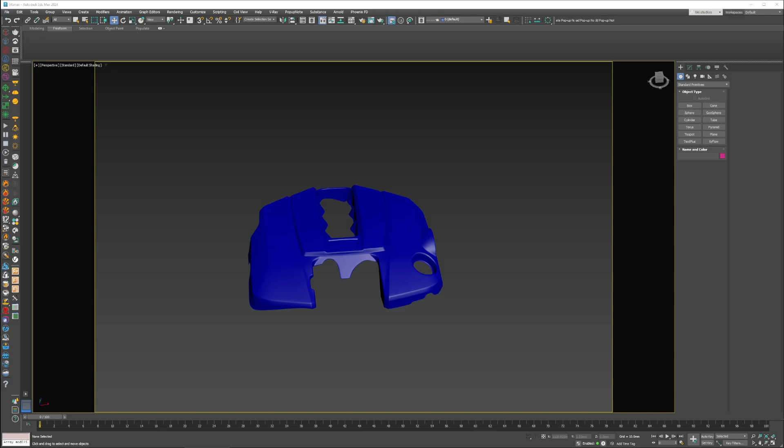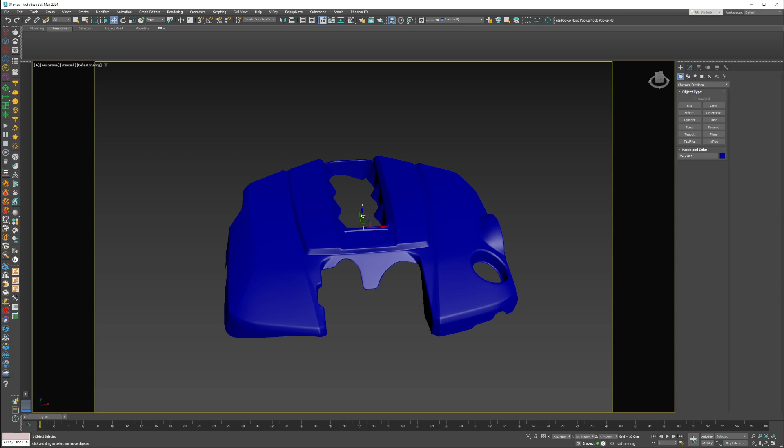Now that we have the model done, for people doing the carbon fiber stuff like myself who are 3D printing molds, we need a flange area and to close off any holes, so that it's a proper mold. This is going to be another video tutorial like the other one that's tedious and long, but hopefully informative.

I have a new file saved so I'm not destroying my old one, and now I'm going to treat it like I would on the table. First, I'm going to flip it upside down 180 degrees. In 3ds Max, when working with a 2D shape, there's a front face and a back face. The back face is black, and the front face has a tone to it.

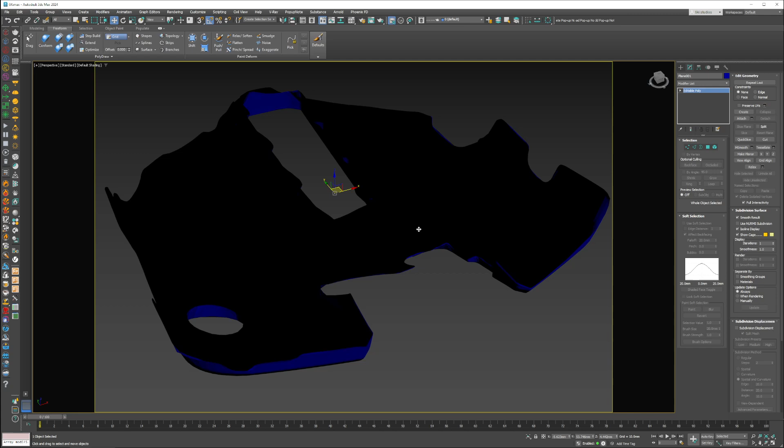So what you have to do is select all the polygons with Control A, and click the flip button. Now it's flipped inside out. This is good, this is what we want, this is our front-facing object now.

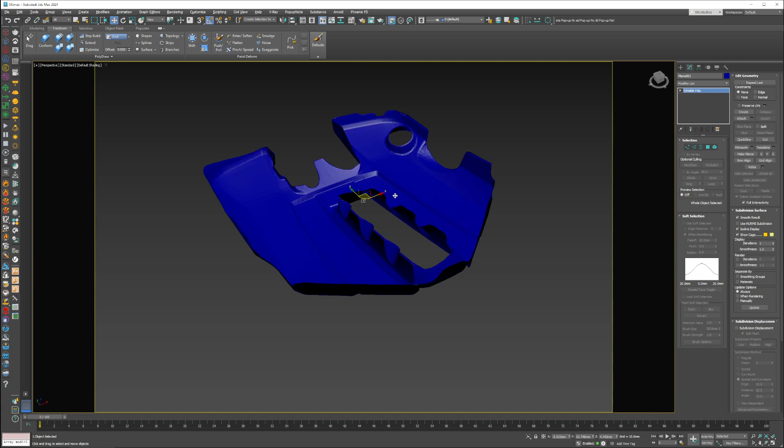Now, just because of how I would look at it, I want the mold to be laid out kind of like this, just personal preference. So I'm going to make the object color black by going here, and then give it a material.

Pressing M opens up the Material Editor, so I'm just assigning a random color. The reason is if I press F4 and click off of it, now my wireframe is black, but my material color is green or whatever you want it to be.

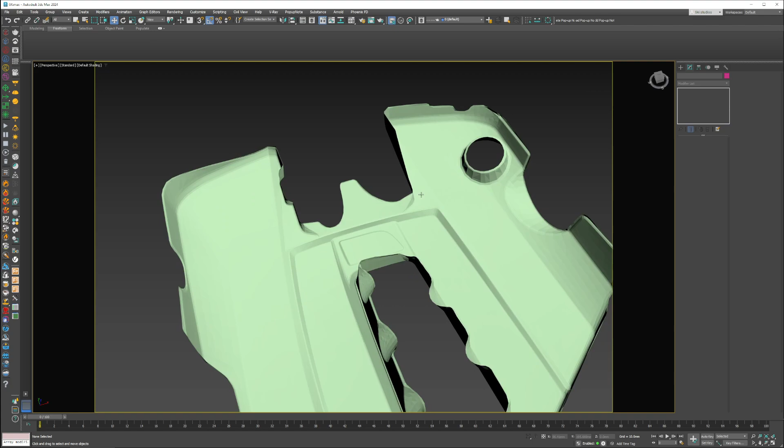First things first is the oil cap. Now what I'm doing on the CG side when I make the flanges, I also like to give myself a reference, kind of like cut lines. So before I start doing this, I want to go Control A, select all the polygons.

See where it says smoothing groups - you want to click clear all, and then click on one. Then for the version of the tutorial, let me move my... I hate doing this, but for the sake of the tutorials it is important.

Here you have your material editor, and pressing M opens it up. Here you'll probably have it set to standard or something, and if you don't have it displayed like this, you might have it another way, which is not my cup of tea. If you click on modes and click compact, it switches it to these spheres. So click on where it says standard or whatever it is, this top right button, and change it to a multi-sub object.

For me it's taking a second to open up my actual... oh there we go, crash. One second, all right, I restarted the software. I'm clicking on this button again that says V-Ray for me, but you might have something else, and now I am going to change it to a multi-sub object material.

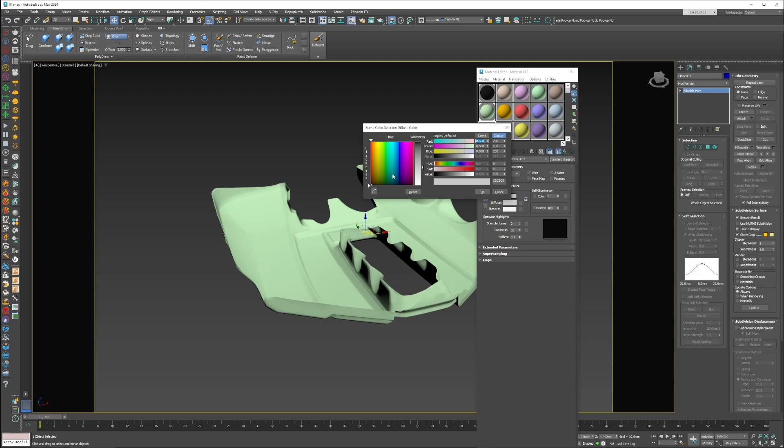Now I'm going to set ID to 2, and you'll see what this does in a second. Where it says none, click on the word none and change it to whatever you want - I did standard legacy, so that's the one I chose. This is going to be the mold surface, so if you treat it like a mold, I'm going to make this one orange. Now, just for personal visibility, I'm going to make the flanges a different color, let's say green, so this way you can identify what's what.

So now, with our whole thing being material ID 1, we also have this thing called polygon material IDs. So whatever you make ID 2 changes to that green color. This actually doesn't contrast enough, so let's just do this.

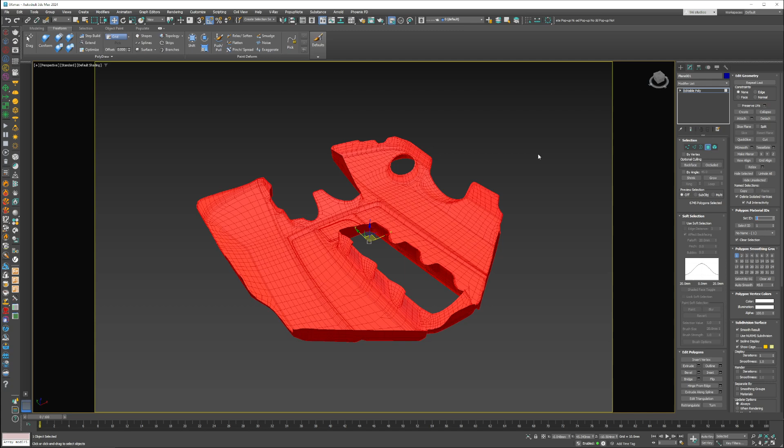So there we go. Now I'll give it a little bit of a highlight just so it looks prettier in the viewport for myself. I'm going to set this ID to 1, and now what I'm going to do is just start creating my flanges. So the first thing is this oil cap area.

I like to give myself cut lines or reference markers of where the cut will be. So what I'm going to do first is select the border tool, select the inside circle, and click cap. Now I'm going to set this ID to 2, and a smoothing group, it could be whatever you want. I'm just going to do it to 2. So now I have this as a flange that's capped off.

Now what I'm also going to do is click extrude and just offset it a little bit like this. And now I am going to click inset and just inset it like this.

Now I am going to do the edge mode. Select these edges by double clicking on one of them. Hold Control and press backspace, and that gets rid of the edges and the vertices. The reason for that is if you do just backspace, you still have the vertices hovering. So that's why you want to do Control backspace.

Now what I'm going to do again is do another inset a few times. That's it. The reason for that is when we turbo smooth it, you want to make sure smoothing groups is on. And that's where that number 2, or whatever object you put in here, you can make it 3, 4, all the way to 32. This way, whatever's a separate element, it will make that separation razor sharp and clean.

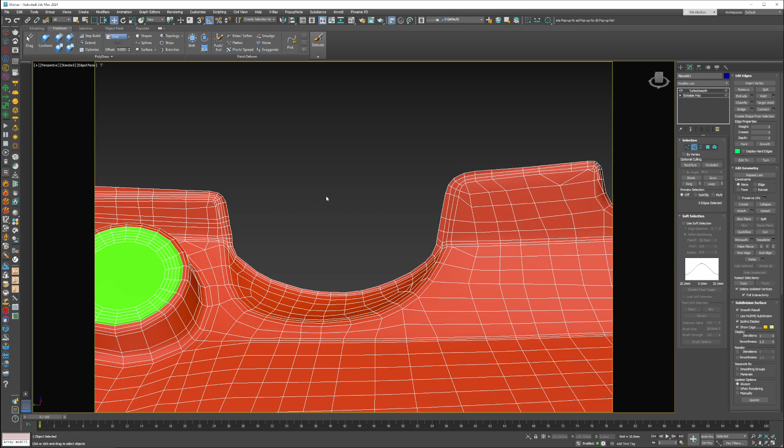So the next thing I'm going to do is go over here, and the beautiful thing about the flange process is it can be pretty sloppy. So I am going to bridge this over, go in here, and go to the cap button again, border, cap. Cap is only allowed to be selected or clicked on if you have the border tool selected. And now what I'm going to do is just go across and cut these up, like that.

I'm just creating edges across the surface. So then I'm going to do just swift loop. Again, the shortcuts — watch the other tutorial about these things.

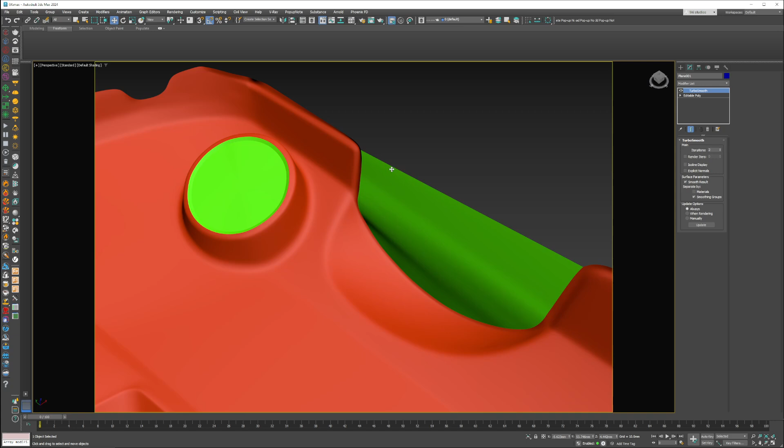Now I'm just going to select these insides, make it an ID of 2. Make sure you do clear all, and just polygon 2. So now when we have the object smoothed, when you're laying down the carbon fiber, you don't have a hole — you literally just closed it all off.

So there's that. Now we have this hole right here that we can close off, so it's just a little easier to lay down the fabric. And this is just based on my opinion and my experience, so I could be completely wrong about what makes it easier or harder, but here we go.

I'm going to set this to number 2, smoothing group 2. There we go, so we are slowly closing things off. So now let's just tackle this monster right here, the middle.

So I am going to select this edge and then this edge — you can't select it on the back side or it wasn't working. I'm just going to bridge across, select those.

So there we go. Now what I want to do is just kind of work my way into the inside, if you will. So I'm just going to do a few swift loops, and I'm just kind of eyeballing how many it takes to do what. So right there, and right there.

All right, so now I'm just going to set these to material ID 2, and for the moment, smoothing group 2, so I could at least get an idea of what I'm looking at. Now what we're going to do is probably go all the way from there to there, as you can see, we have a lot more edges here than we do here. So we could either add more ourselves or not, and for the sake of convenience, I will.

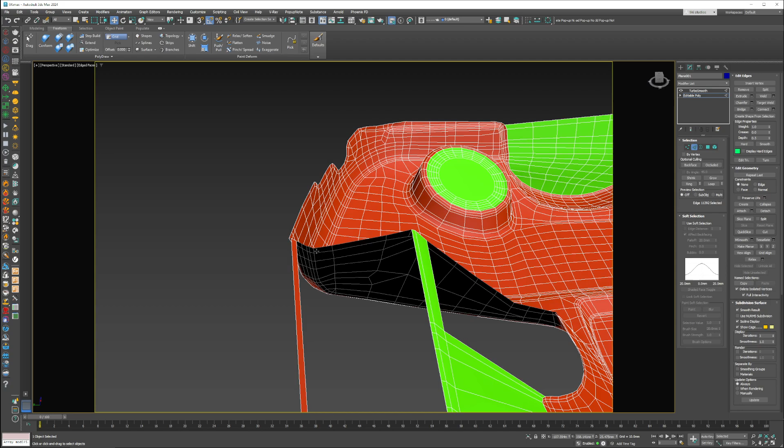So I'm just going to connect it by 2, like that. This way I can just do that there, that there. Make sure you're not ruining the flow of the geometry. That looks fine. Awesome. So now I can literally go from there all the way out to here. Go from this edge to this one. There we go, select that.

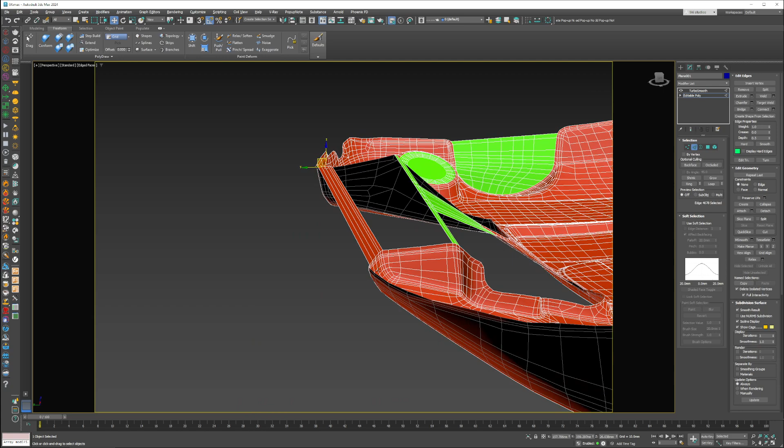Now select the border tool, deselect these outsides, so that way we could just bridge right across. Now I'm going to see what happens if I just do bridge. As you can see, we get triangles, which means we have more polygons on one side than the other. And actually, I may have selected that. So we still have more polygons on this side than we do on that side. For us to fix this, we either have to remove stuff from this side, add stuff from this side, or manually add the flow.

So what I'm going to do for the moment is, without having to focus on adding more into my actual mold surface or the actual hero part, I'm just going to go ahead and bridge these, connect those, give this material ID 2, smoothing group 2. So now, as you can see, we're starting to close it off slowly.

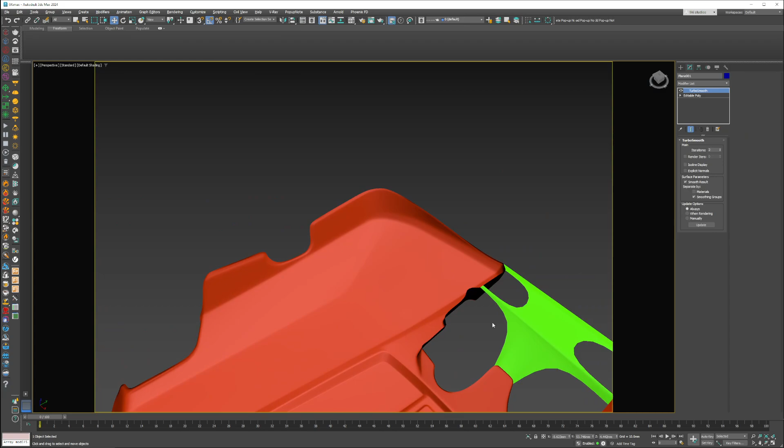All right, so now I'm just going to connect these two right there, bridge it over, perfect. Material ID 2, clear all, 2. See, now we're starting to get somewhere, slowly closing it off. All right, now let's see what we have here.

And again, this is the flange area, so this could be a little bumpy and messy. It does not matter because this is not our actual mold. So let's see here. We have 1, 2, 3, 4. We have 4 edges on this side and only 2 to work with.

So I'll just do a quick little connect. Now we have 4 and 4. That should bridge across perfectly. My focus is not to distort anything on the actual hero surface. So there we go, material ID 2, smoothing group 2. Now we're starting to close it off. All right, now we broke up this one big monster into 2 little segments.

Perfect. So what I'm going to do is keep the workflow as simple as possible, so I'm just going to go ahead and bridge that. Now I'm just going to do a quick little sloppy selection like this. Let's see what that does. We have more selected there than there. Let's see, all right, so we have 1, 2, 3, 4, and then 1, 2. So that means we've got to simplify it a bit. There we go, I'm going to quickly connect it there.

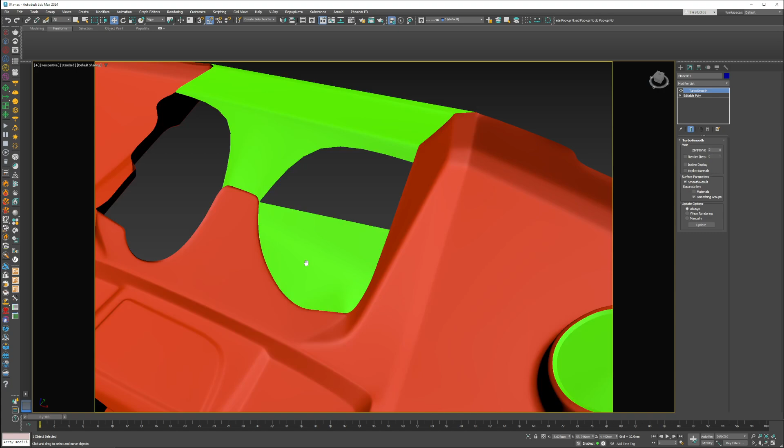And see, I am now just kind of going at it, just throwing polygons around. It gets very simple for the flange stuff when you don't care about creating bumps, because this is just the excess area, not as critical as the actual mold surface. So there we go. And with the beauty of smoothing groups, it does not ruin your actual hero part. So as you can see, this area can be messy. I don't care, as long as my mold is beautiful. And that's what the smoothing groups do. It creates a razor sharp edge, and if you're 3D printing and melting plastic, it doesn't even matter.

All right, now I'm just going to bridge across there. Perfect. Now let's see here, I'm just doing swift loops. I'm just throwing in, just BSing my way through it, just enough to have something to work with. And again, it's that logic of less is more. The more edges you have, the more annoying it's going to be to work with.

So I'm actually going to go select these edges, ring, collect those. I'm just going to go in and collapse these. Here we go. I don't want to have a lot of segments to work with on the end of the flange. It's just going to get very, very messy and annoying. I'd rather have it less and smooth it all out.

Alright, so select these, 2 and 2. See, still looking good. I don't care about this bump. There's bumps and surface imperfections here. Does not matter. My mold is beautiful. That's all that I care about.

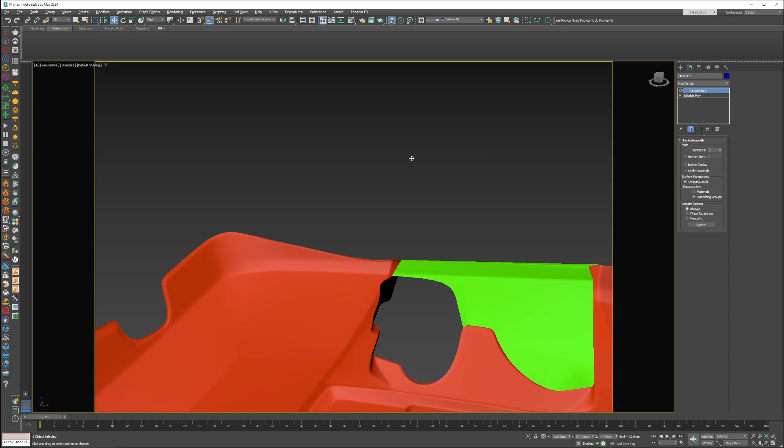And we have these nice little crisp edges, so that way when the part's out of the mold, it's easy to trim the fat. Alright, so now we have this little corner here, and let's see here.

The way I'll approach this one is I'll actually extend it out, and then from here, just like that. And again, now I'm just kind of winging it. So let's see here. I just wanted it to be away from the surface. So now I could actually go in and do stuff like this.

And as you can see, the operation is the same. Swift loop, bridge. And then here, cap. All right, perfect.

Make sure we just have that selected. All right, ID2, smoothing group 2. There we go. It's bumpy. I don't care. I just want to be able to throw things together and create a closed off thing. All right, there's that. And I'll do one more because it doesn't really matter.

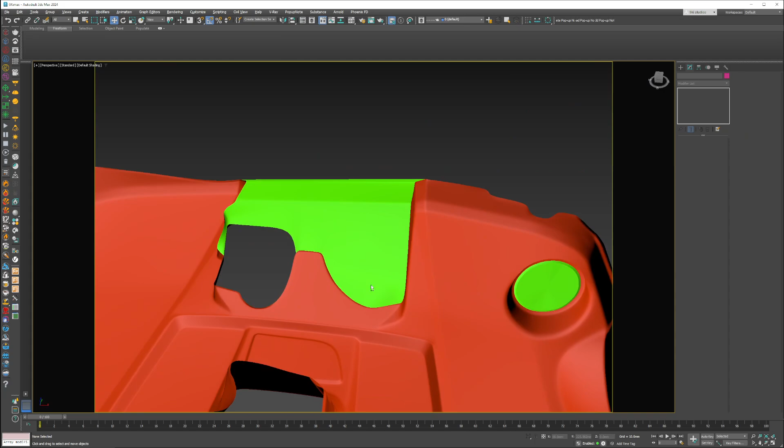All right. Set ID2, smoothing group 2. Looking awesome. All right. From here, I'm going to just bridge it over here like that.

Connect as many of these as I can without adding more. And what I'll probably do is just so I could make sure I don't risk any kind of surface flaws, I'm going to cap that. There we go.

ID2, smoothing group 2. There we go. Now we're just making it nice and easy, not too busy. It's a very simple surface to kind of bridge and fill in the holes with.

All right, so over here, I am just going to bridge out right there. So here, 5 points, I can get away with just capping that off. All right.

I'm going to triangulate that one. It's 4 points, but it does create a triangle. All right, here it's 3 points, so I'm just going to do cap.

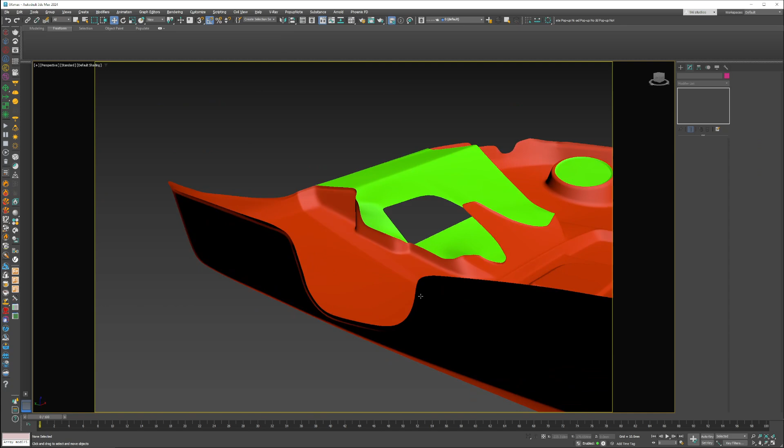And these are just quick little modeling shortcuts and workflows you develop over the years. But again, pinches, don't care. It's looking good. That's the 3D printer's problem to worry about. All right, so far so good.

I am going to bridge these across. All right, I only need one segment there. Perfect. So as you see, slowly getting there.

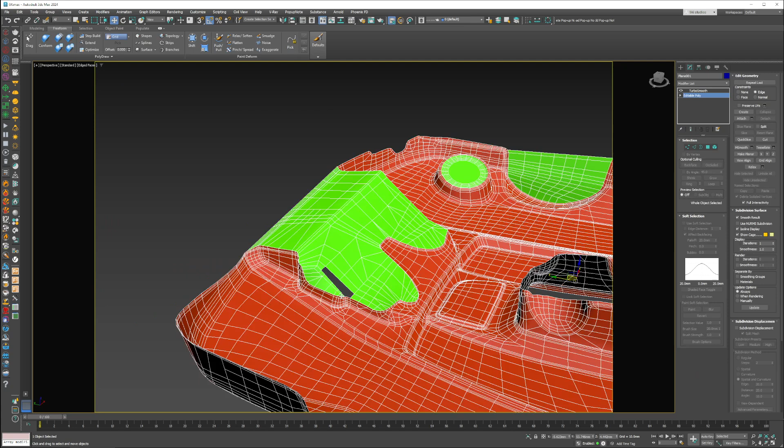Closing it all off. All right. Perfect. And let's see here. Make that. What I'll probably do is connect this because we do have this tight corner right here that I have to make sure I have a segment to triangle. There we go. Awesome.

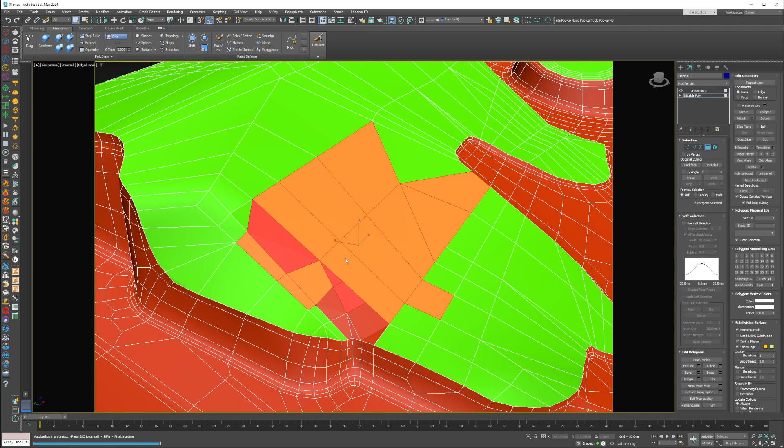And what you can do, because right now if I select on top of a mesh, see how it distorts? If you click on this button right here, now you can literally just drag and drop or magic wand a whole selection. So I'm just going to select those, smoothing group 2. And there we go, we just totally created that whole surface area.

We capped off that. Let's kill this little pocket right here. All right, I'm going to just bridge across. Okay, cut there. Triangulate that. Now, as I mentioned...

If I could offset it like this and make life easier to be able to see where the cut lines are. Perfect. I'm going to cut that off.

Select these two, grow. Smoothing group 2, set ID2. There we go. Now we're slowly filling it in. So there's that. We have a big pocket right there.

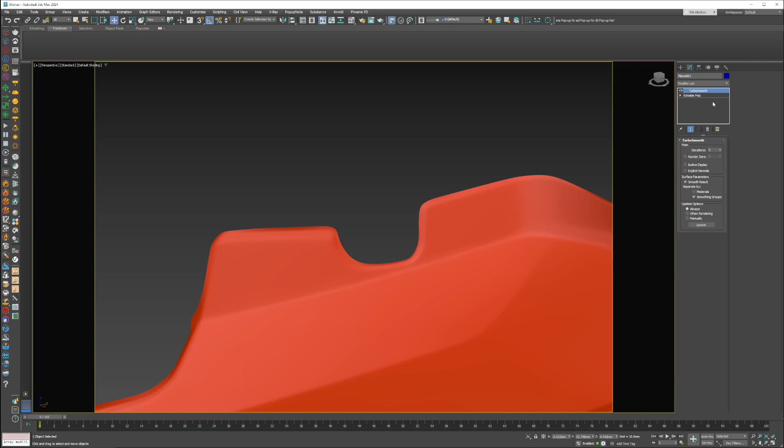So I could either just leave it and just make the flanges out, or I could bridge it out. I think I'll leave it for the moment. Let's go in, get rid of this detailed little corner. Perfect.

So let's see here, I'm going to just cut it up right there. All right, shoot it back. And honestly, I think I can get away with doing the bevel modifier.

So same thing, it just extrudes and bevels at the same time. Sometimes if you have polygons too close, it creates geometry issues, so that's why I don't use it often. But for the sake of this part, we can get away with it. So there we go.

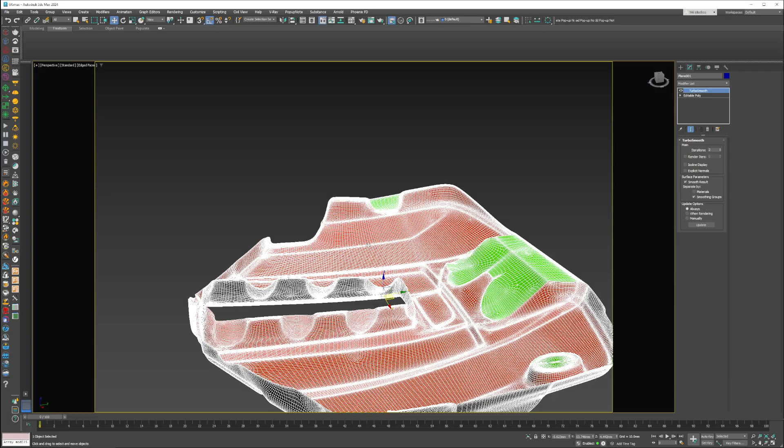All right, now this one. So now let's just do this beast. This is the annoying one. This is the most busy area.

With connecting parts, so what I'm going to do is just send it with a bridge and see what happens. I'm deselecting the outside segment, kind of BSing my way through it, and I threw a bridge on it. We have a lot more polygons selected on this side than we do on this side, so let's see if I deselect these. Less triangles, less triangles. I'll probably try to skew it off over there.

Okay, this is not going to be pretty, but whatever. So set ID 2, smoothing group 2. Let's take a look at how this looks. So now when you're laying down the carbon fiber, yeah, it ain't pretty, but you know what, it might work just fine. The only problem is this has an upward lump right here.

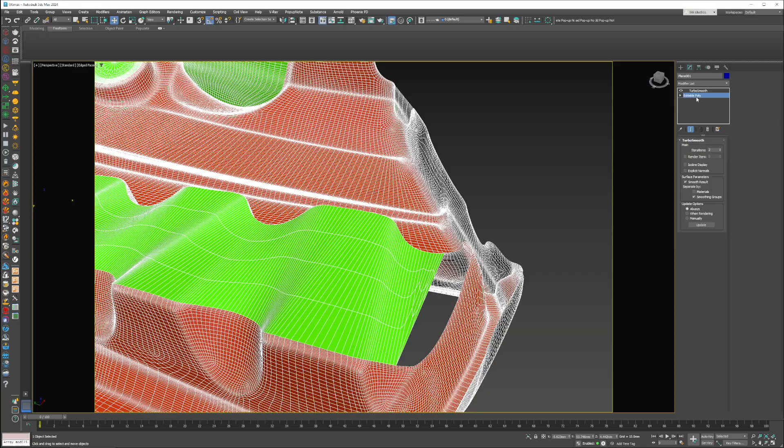So what I'll probably end up doing is just do a connect. I'm going to select these and raise them up to help this area right there. Raise it up a bit, and then I'll go in and connect these to lower it, so I could manually work with less and create this little offset.

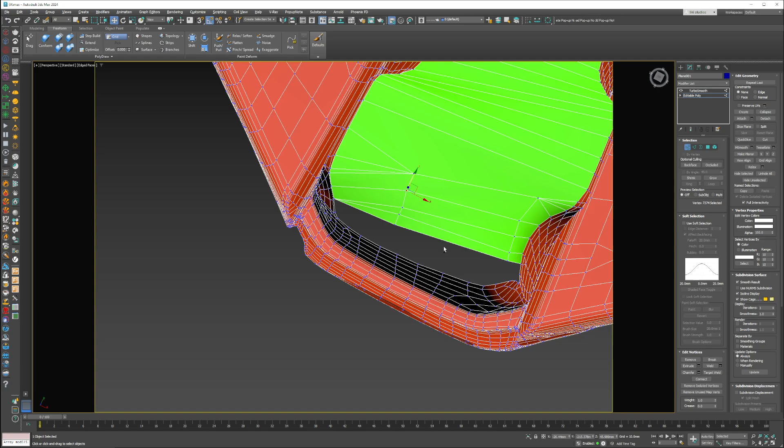Let's see here. If this works out, this will be great. It'll be a very easy way to work with this really annoying centerpiece. So I'm just connecting, perfect.

Let's take a look at what we have here. Yeah, it's messy, but our actual part is beautiful. So okay, don't care. Now let's see what we could get away with over here. You gotta really pay close attention to what you're doing so you don't accidentally mix up the parts and the flanges.

So I'm right away assigning material IDs so I don't accidentally mistake the part for no part, if that makes sense. Now what I'm going to do here is just do connect, but with a bunch of them. A few more segments like that, just so I have things to bridge to. Cap this off. Go in again, right away, identify the flange areas from the model.

Perfect, and almost done, that's awesome. We flew right through that one. It ain't pretty, but it worked. All right, cap. Set ID 2. See here? Perfect.

Beautiful. All right, you just throw the fibers wherever the hell you want on that one. So let's see here, that I can bridge that.

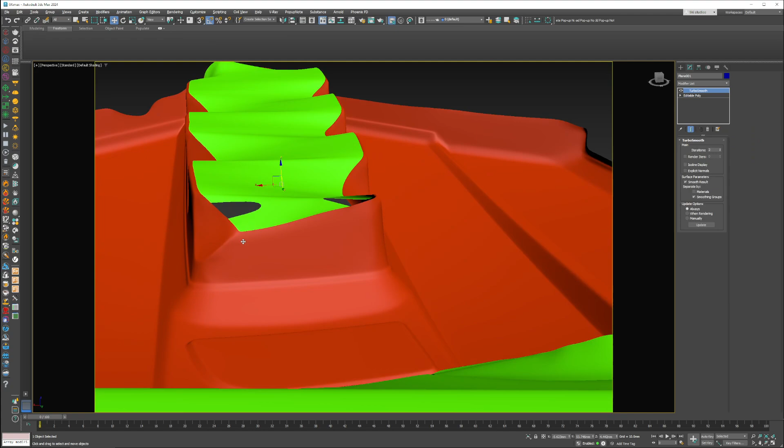All right, that's looking good. And see, we got a little pinching over here in the actual geometry from the modeling stage, so I'm just going to go in and try to fix that there. And see what we can get away with. That made it better, and my buddy could just sand that down, whatever, no big deal.

Little prep work, all right, so material ID 2, polygon ID 2, there we go. Awesome, and one little pocket left, and the center is done. All right, so let's take a look. Oh beautiful, we could bridge that to that, that to that, there, and cap this little sucker off.

All right, 2 and 2, done, awesome. So we are almost there.

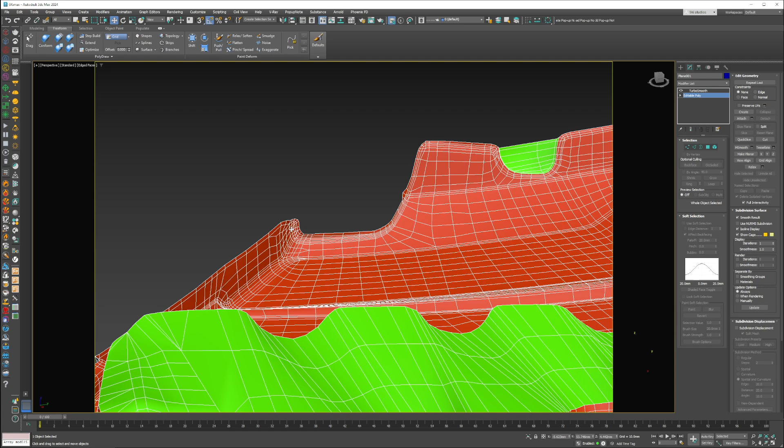I think I'm just going to cut right across, so from over here all the way down here. And now as you can see, here was, based on the scan data, some kind of little pocket thing, whatever. I don't know, I don't have the engine cover in front of me anymore, so I'm just going to respect the design based on what we retopoed, and set material ID 2 and smoothing group 2. And just to mention again, the smoothing groups and material IDs, they do not go hand in hand. You can make that whatever you want.

I just like to wear it kind of like numerical order, so that's why. Alright, I'm just going to cap that off. So 2, clear all, assign 2. Beautiful.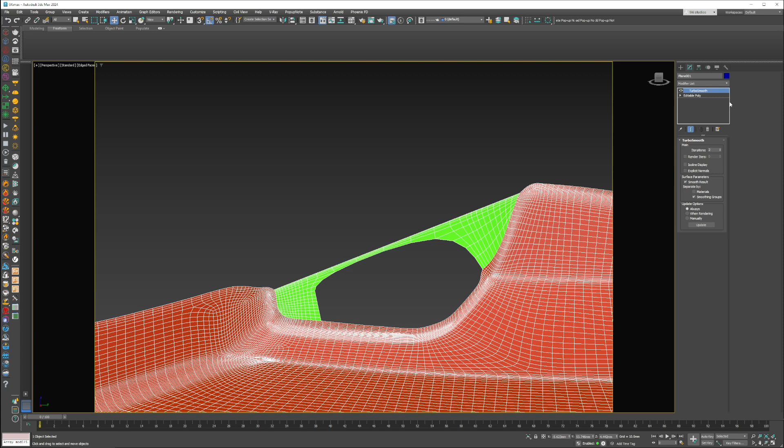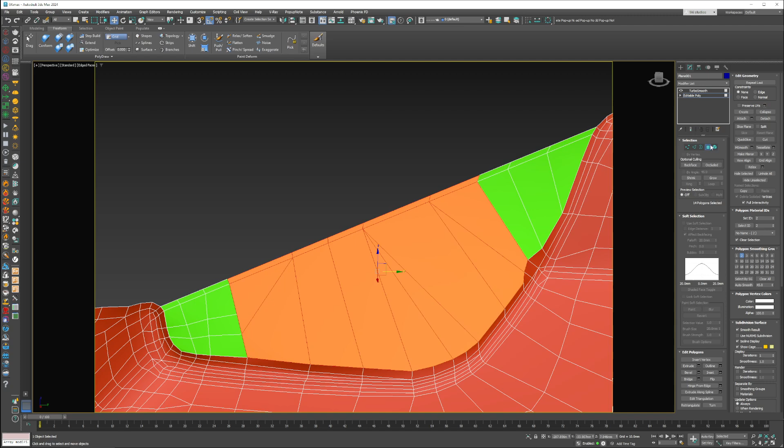Alright, so now I'm just going to bridge that off. Bridge that across there, bridge that over there. This is just kind of where, when you model for a while, you can see what you can get away with and what makes better sense to bridge in what direction. So now I'm just going to bridge that there, and we just close that off. Alright, and smoothing groups 2. There we go, perfect.

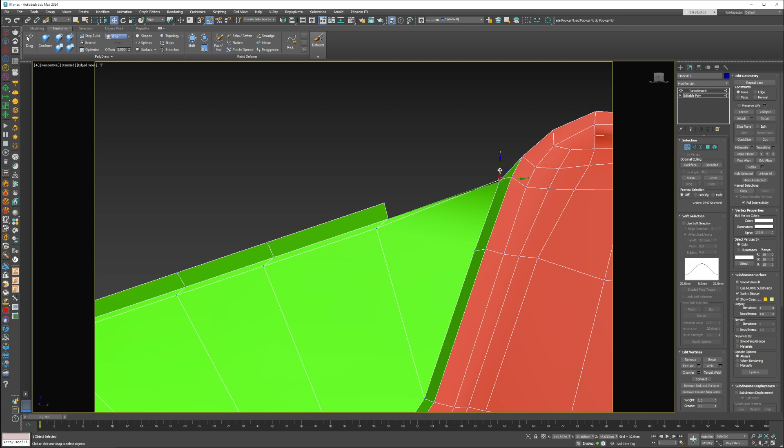Alright, and again, this one could get a little messy to figure out how to trim it. So I'm just going to create a little reference thing, a little bevel. Alright, delete these out. See how this is where I mentioned why I don't like the bevel too much. It creates those flaws. Because this is the flange, I could go in and quickly just offset it and fix it. But in my normal modeling workflow, I don't like to use bevel, it's just too problematic. But I'll just quickly offset these things like this and we're good.

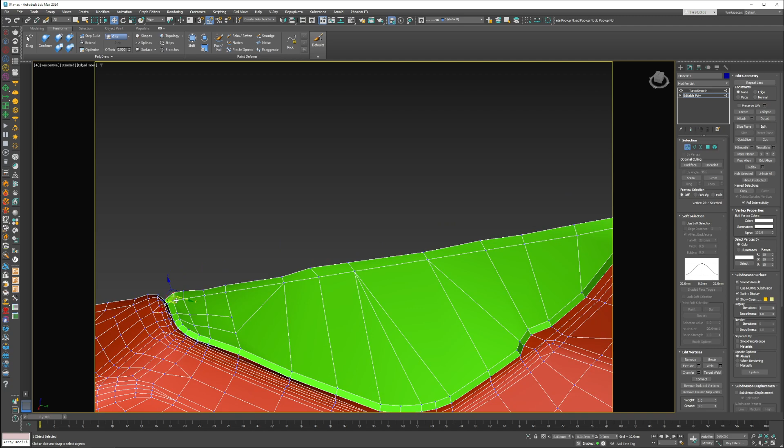Alright, and then the trick is when you do the bevel, it does change the smoothing properties of the inside. So you want to select all, grow, go in, clear, and assign 2. So that way we have that little crevice. Alright, so for the most part, we are done and good.

So now, I don't know how Nick's going to infuse it, I assume top to bottom. So here's my personal thing. For side flanges where the gum tape goes, I usually like to give it 50 millimeters. So I just create a little reference plane, so 50-50. That just gives enough space for carbon fiber to fall off and the gum tape. It's a little tight, so I'll probably give Nick 70. He likes a lot of flange. So there we go, I'll make that 70-70.

So see, I'm just making that. Now I'm going to copy this. Usually for my resin stuff, I do like 70 as well. It should be plenty for him, so I'm just going to leave it at 70. And then here, I'll do 70 as well. Because here, like if it was me doing, I'll put the vacuum line right down the middle or whatever, because there's all this negative space that's not even the geometry anymore.

So now that we have that, it's time to just really extend the flange, so I'm doing border tool. That makes it a lot easier to select, so I don't have to manually go in and do it. Alright, I'm just going to select these segments right there.

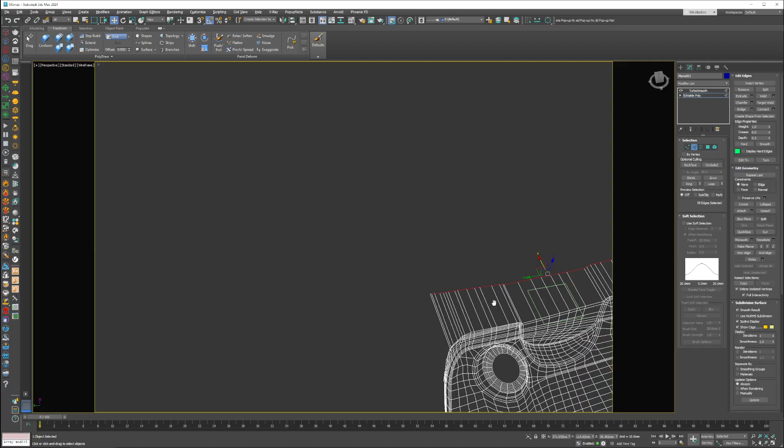Go all the way. And again, this is just how you almost just visualize the flange. So I'm going to shift drag, extend those edges there. Go into the left view and click View Align, and that just makes it a perfectly straight flange. Reference, see how I have that plane? I'm just going kind of roughly to the edge of that. Perfect. Alright, so now we have our flange area.

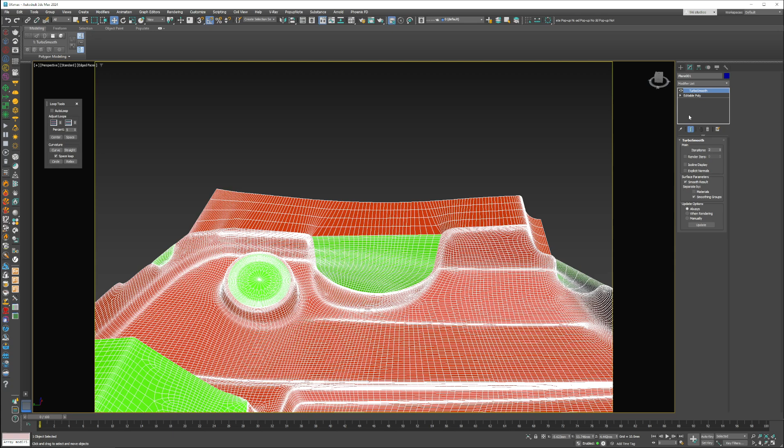Now as you can see, some areas it looks fine, some areas it's annoying. So what I'm going to do is I'm just going to deselect this for the moment. With this area selected, I am going to the modeling tools, I am going to the loop tools right here, and there's a button that says relax. Just click that a few times, and it does exactly what the word means - it relaxes the edges. So now the flange is nice and smooth. It got rid of that little crevice, right angle, all that crap.

So I'm going to do set ID 2 and polygon or smoothing group 2, and let's take a look at how that looks. Alright, that looks good. For the moment, I'm going to leave that as is.

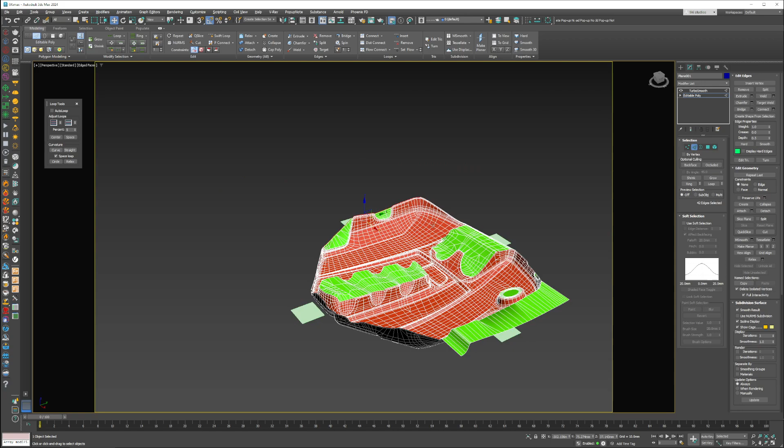Now we do the same exact thing for this side. So let's see how far we could go with the selection. I'll probably go right over there, right up to here with that. Let's extend out. Yeah, that's fine, we can get away with that. Alright, do the same thing. View align, boom. Now go in, extend it out. So there we go, perfect.

Now what I'm going to do is kind of isolate the areas I'm going to relax. So first, I'm just going to select this little stuff right here. Relax them, just keep clicking through it. Then I'm going to go over here and relax that.

Now I'm going to do loop. Hold control, click on the polygon. It makes a selection of everything that's connected to that edge. ID 2, polygon 2. There we go. So now we have the side flanges done.

So now it's time for the top. Same thing, I'm just going top and quickly deselecting by holding Alt and making a selection. Just like a lot of programs out there, Alt is a deselect, Control is to add. Now instead of view align, there's also X, Y, and Z hotkeys for making the edges planar. You can just click through them and see which one's what. So Y is the one we want.

I'm going to do the same thing down here. I'm just going to extend it out and then we'll figure out how wavy or bumpy it is. So shift drag and then Y, boom. There we go. Now we have that.

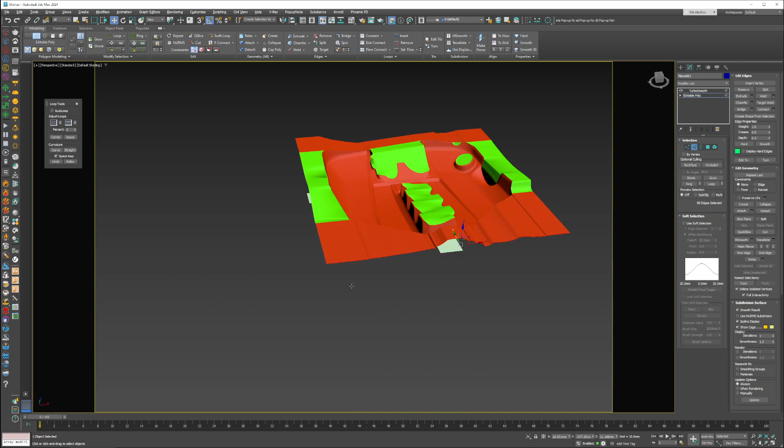Now we gotta make sure this is nice and smooth. So selecting all these, I'm just gonna click relax and skip right through it. Keep clicking until things do look nice and smooth and relaxed. Smoothing ID 2, polygon 2. There we go, that area is looking nice.

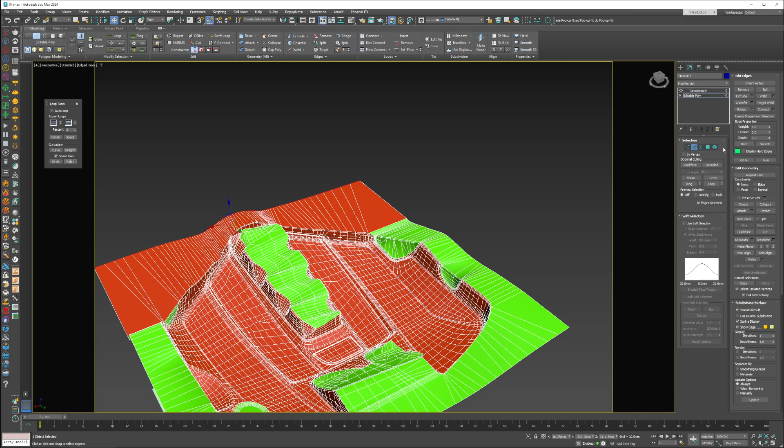Same here, click relax, just really let it blend itself out. Perfect, all right, and same thing. Smoothing 2, ID 2. All right, so now we have that.

Here's the deal, this is messy. This is nasty looking. Same thing goes for here. So what I'm going to try to do is manually fix it now.

I'm going to select like this vertex, turn on the edge constraint, and just drag it out. So now I am going to manually space these areas out to try to make the transition a little friendlier on the final result.

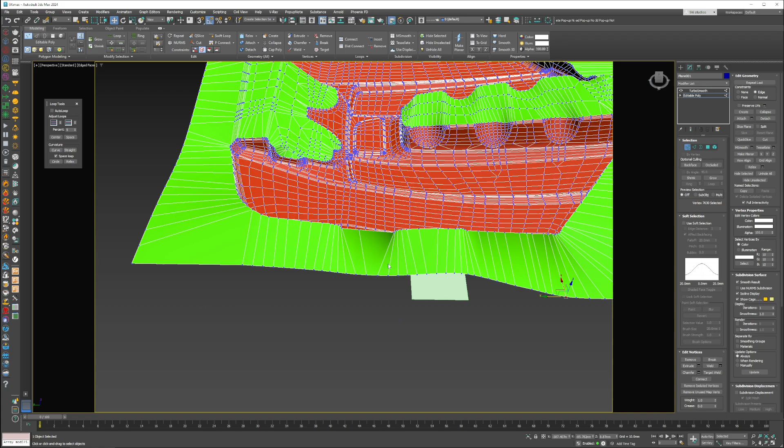Same thing goes here. You can see like this is kind of almost going inside of itself, and you don't want that. It'll work, it'll 3D print, but if you can make it look better and smoother, why not? That could just make the 3D printing process more of a pain. Alright, so there's that, see, now we have this one also kind of going on the inside of itself.

And I'm just dragging these out, not much to it, just extending it out. Alright, so yeah, it's not the prettiest, but it's a lot better than it was. So that's fine.

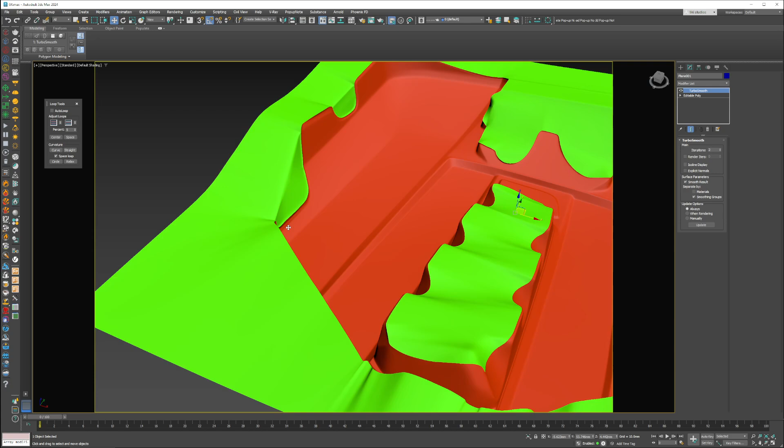Now over here we have a similar issue. You could either, like right here, you could either connect this segment or just leave it. I'm just gonna leave it, I don't care, that's fine. No, because that creates some bridging issues.

So here's what I'm gonna do. I am going to delete this polygon, this polygon. I'm gonna do a swift loop. And then I am going to delete these two. I'm going to bridge that out.

Make sure you don't do what I just did and accidentally move it. Alright, and I'll just select this right there. Okay. And I'm just going to bridge that. And again, make sure you remember to right away separate these out. Perfect.

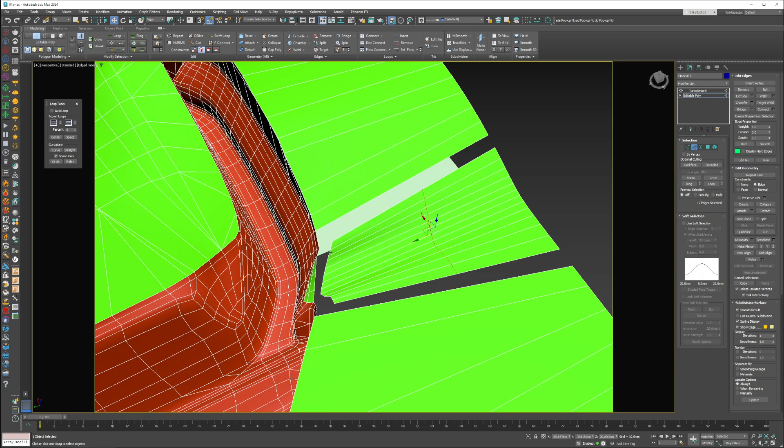And what I'll probably end up doing here is not even there, I'm just going to go all the way up here, because now when I bridge it from there to there and from here, as you can see, we have a lot more faces here than we do here now. So I could go in and select a handful of these segments, control backspace, delete, bridge. There we go, that's an even distribution.

So now I'm just going to select these edges, relax, and actually I don't even need these segments right here. So control backspace, just these out here, relax, and now I could bridge these right over here. Smoothing group 2, all right. So there we go, as you can see, that fixed that problem area.

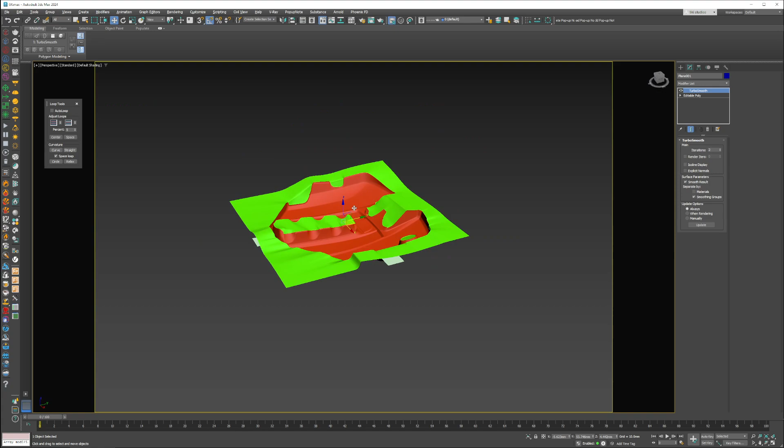Alright, so now the last thing is this little flange. This is just going to be annoying to stick gum tape to. So now that I have it all laid out, I'm just going to turn on the edge constraint, and I am just going to manually round it off. Just keep dragging it all the way out like that.

And as you can see, it just naturally distributed the vertices and segments, which is going to make it easier to stick the gum tape to.

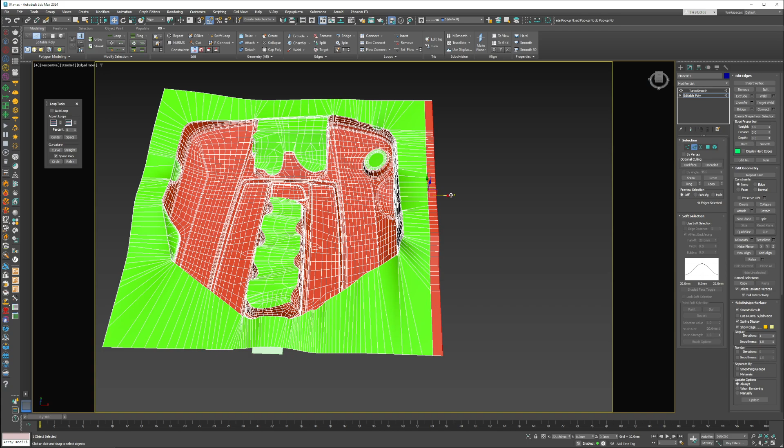So since I'm now 3D printing it, what you can do is, once you have your base done, extend it out another 20 millimeters this way, another 20 this way, and another 20 that way.

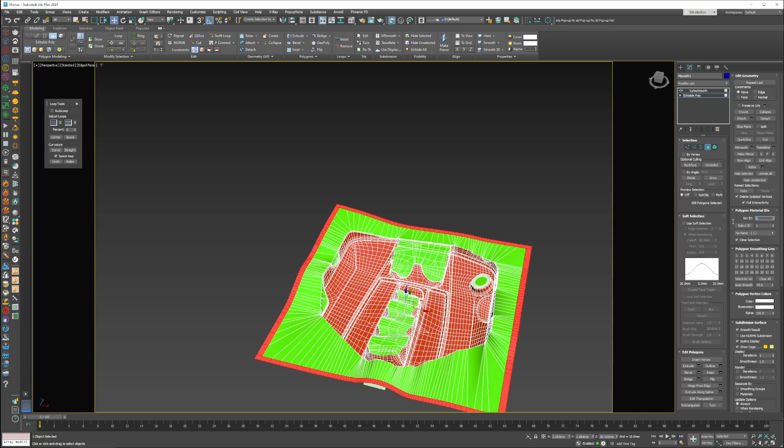This way you have a literally flat, even surface for the gum tape to stick to. So now I'm going to select the border tool. I'm going to make this material ID 2. And this is where I mentioned the whole smoothing group — right now I can make this smoothing group 2, and it all blends out evenly.

But if I really want to make sure the gum tape area is going to be nice and flat, I'll select these and make it smoothing group 3, then do the opposite edges the same way. Deselect those since they're number 3. I'm going to make these insides number 4. So now my gum tape area is going to be razor sharp and perfectly straight.

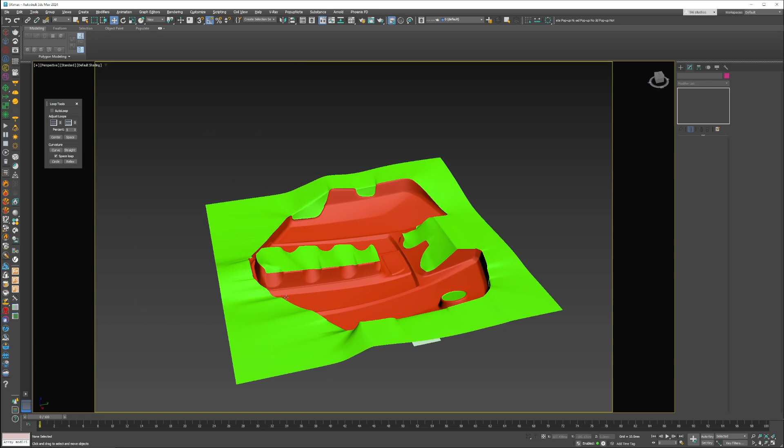So what I'm going to do is first save it, that way I don't lose all the work. Key ingredients: saving.

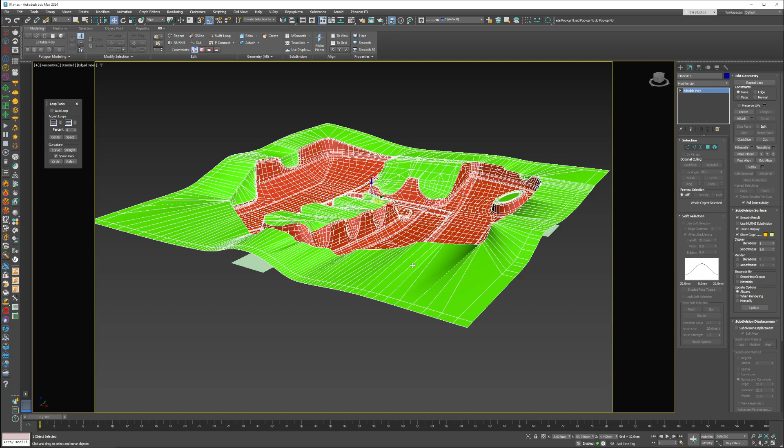It's not expensive, totally worth it. I'm going to use that simply because I just don't care — this is a tutorial of me doing what I do. You could use a regular shell modifier and get away with it, but for molds that are very busy, it's an annoying modifier that's not as good as Shell Pro.

So I'm just adding Shell Pro, and it works in your standard units, whatever they are — for me it's millimeters. I like to usually do 10 to 15 millimeters for depth. So there we go, we're going to extend it inward.

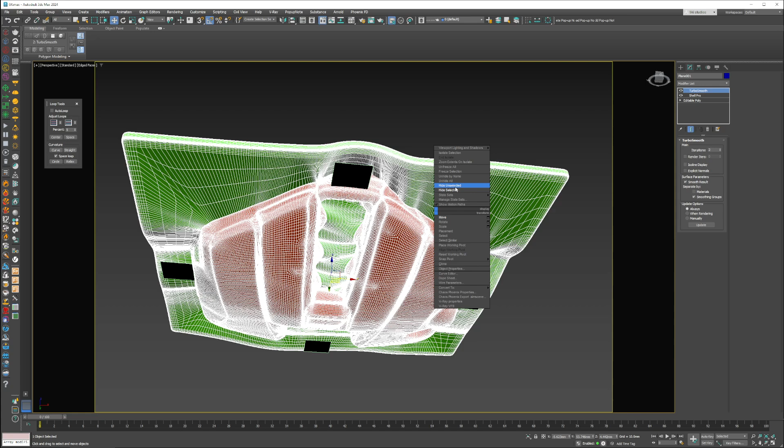And now, as you can see, you can start seeing your model. If you hold Alt and press X, you do an X-ray mode, which allows us to see through it. So now I'm going to turbosmooth on top of that, make sure smoothing groups are on, and that is our mold.

Now depending on how you want to execute it — as you can see, okay, we have some kind of issue right here. So I'm just going to go into here, and this is from the shell. It's just extending it and creating a problem.

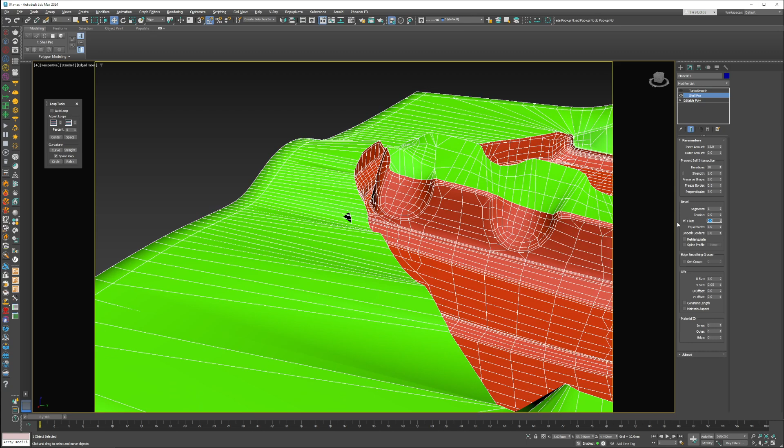So this is what you want to do: inspect your actual surface to see how it's behaving. I believe first of all I don't want any bevels added, so I'm taking those off. And then here it's like self-intersection, so there's these settings you play with.

So what I'm going to do is just play with these to see what's doing what, and what I could adjust to offset things. So let's do something like this. All right, so that's looking good.

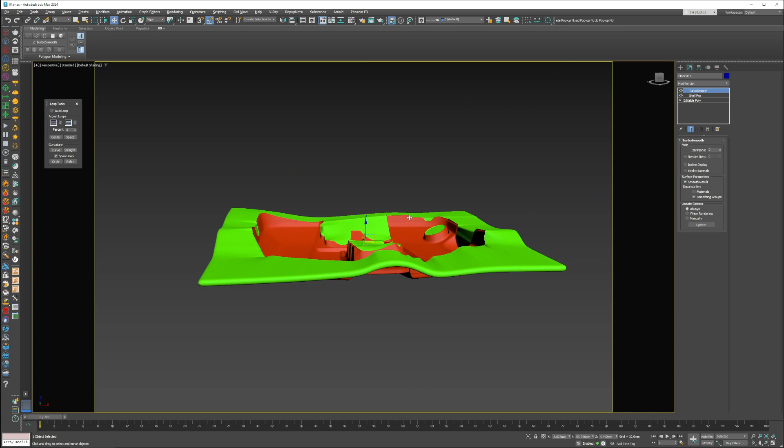Nothing we— well, here we go. See, this is why you got to check it. So what I'm going to do is actually some unfortunately tedious work. Sort of — actually no, I'm not going to do that. What I am going to do is just manually create the backside.

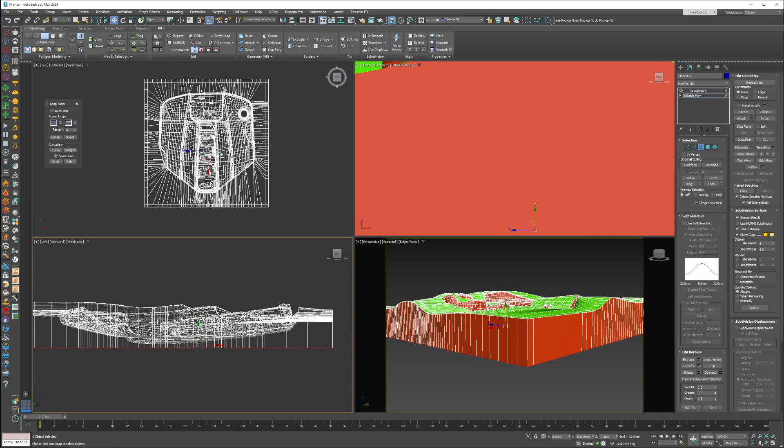So I am going to select these edges — this is a very complex thing. I am just going to move them all the way down. I'll view-align it from the top, pressing the Z button. As you can see, now we are right around there. Now I'm just going to do another swift loop, edge mode, and move it down. So here we go — this is 10.

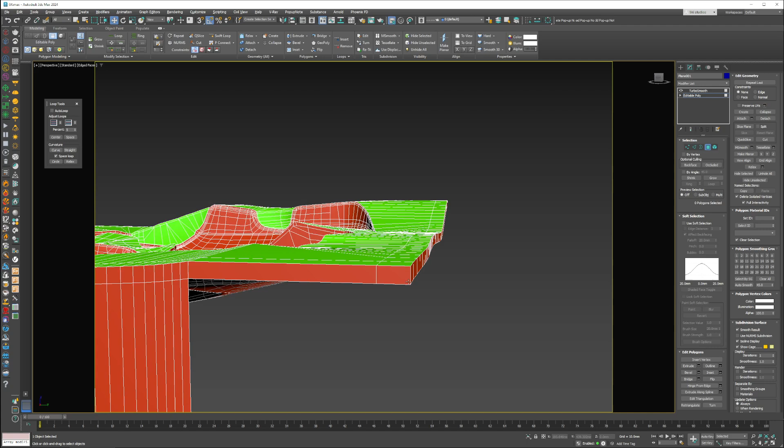This isn't a very friendly mold, but it's great for the tutorial because you can see how to troubleshoot complex areas. Now hold shift drag or control shift drag down. Make sure you flip this. There we go.

Now I am going to select both of these borders, hold control, press on the vertex mode, and click the weld. I'm just going to do 0.001 millimeters, so anything literally touching is going to weld. That's the back side of this.

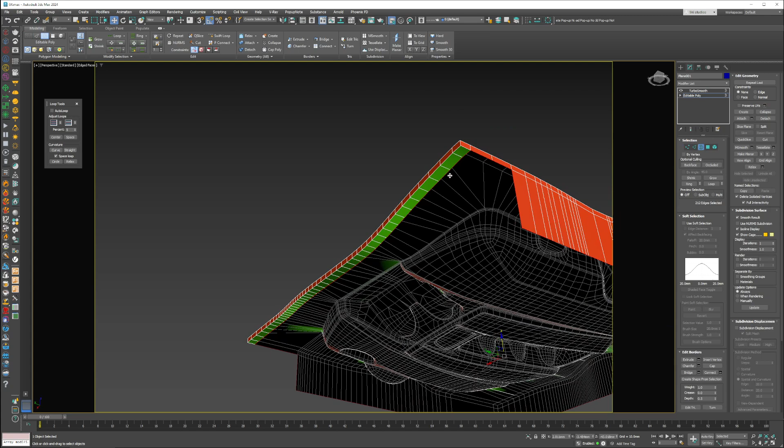Alright, now I'm going to select by angle, make sure that's a number 2, and make sure these are also 2, so you can literally see the flange. Now I'm going to make this smoothing ID 9, just so I'm far away from everything else. As you can see, we are starting to get somewhere. We have some depth in our mold.

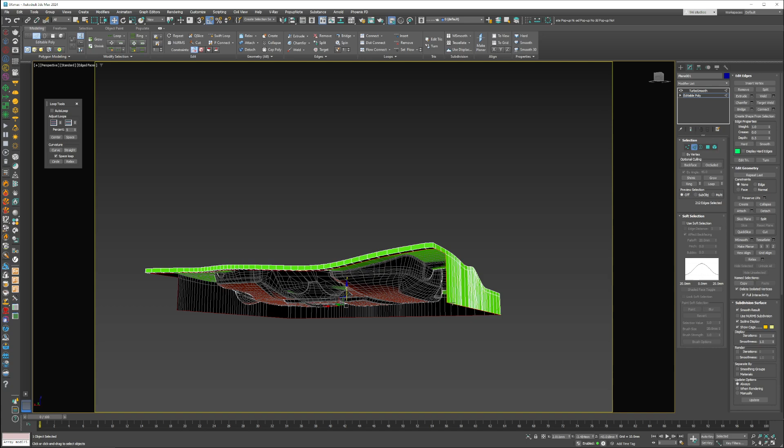So for the sake of this, we got to do the same thing on this side. Unselect by angle. Alright, select all these, bridge. Now I'm going to do this like that.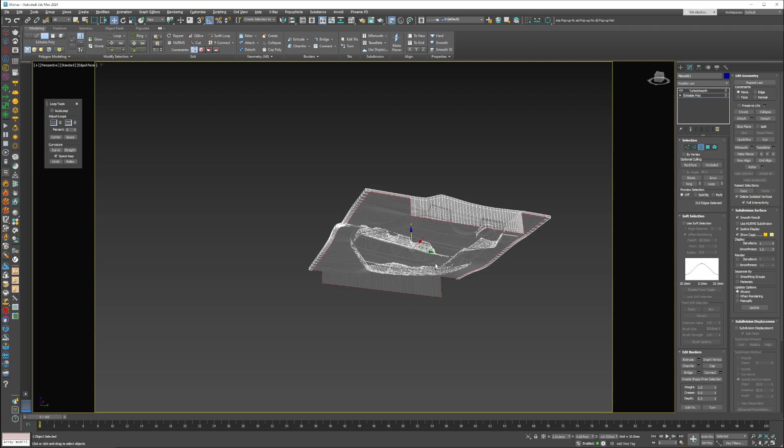Hold control and shift with snapping tools on, that's S. If you right click here, change it to vertex from whatever you have, and just click and drag, click flip again, border tool, control, press the vertices, click the weld, there we go. So now we're slowly closing off our mold, perfect.

Alright, so now I'm just going to bridge all the way from there to there. As you can see, we are penetrating the mold surface, so I'm going to quickly connect and kind of offset away. Perfect. Move this down like so.

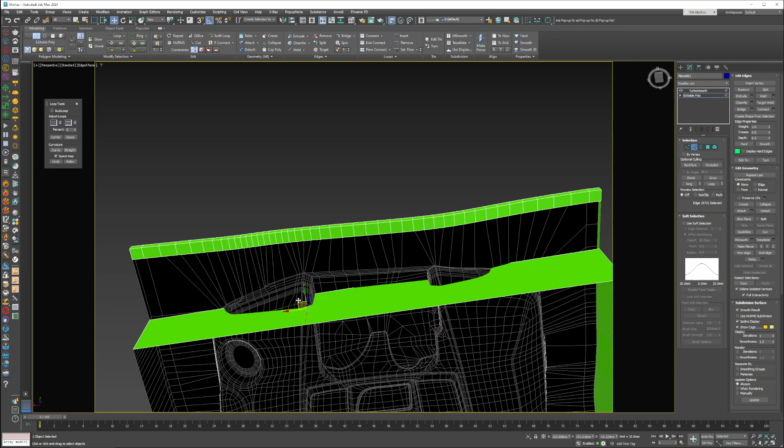I'm going to do the same thing on this side. Bridge. So we are penetrating, so just offset, offset, and now as you can see we are going to penetrate the top of our mold. We don't want that, so we're going to select that whole edge right there and just move it down.

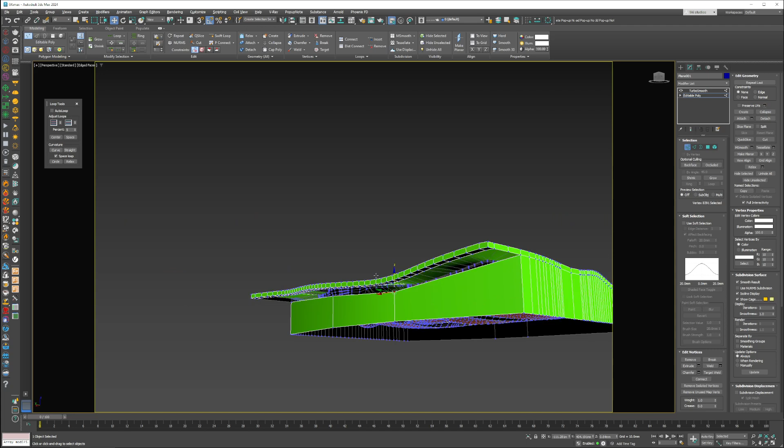This is where it's just the best way I can say is building an eye for seeing what you're seeing. Once you know what you're looking at from a 3D perspective, it gets very easy and user-friendly to move around through this stuff. But at first it can be very intimidating and annoying and busy. So I am going to just bridge that like so.

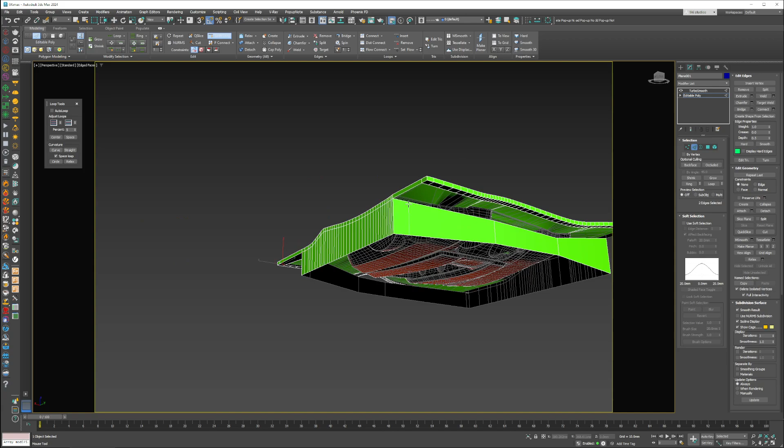Perfect. So what I'm doing is almost like a tabletop. It's annoying, it's going to use up a lot of filament, but the way I see it, this is the easiest way to create this mold, unfortunately. So I'm just going to do, just to be safe, another view align.

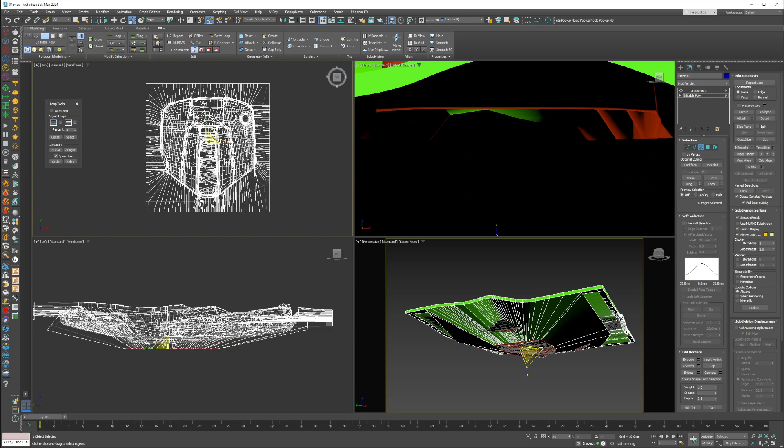Let me see what we got going on here. Let me see if I could just scale these in. As you can see, I could get away with scaling it in kind of like that to use less filament.

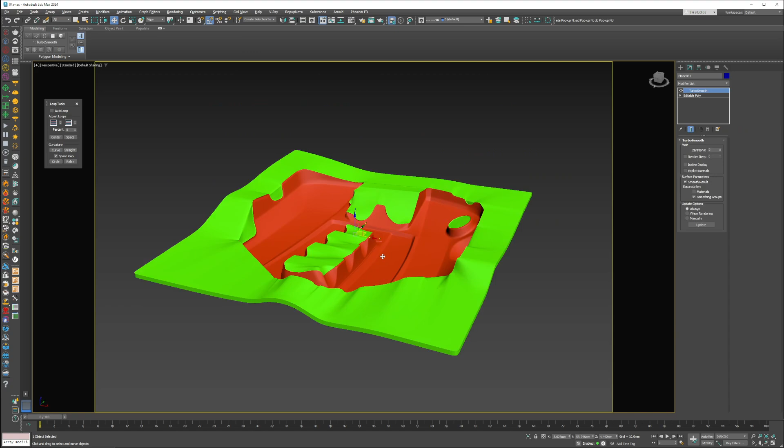So I'm just going to do that right there, and then I'm just going to scale. Alright, so now with that vertex, blah blah blah. We're going to do ID2, and for the sake of a smoothing group, 10. So now as you can see, we're starting to create our own little bucket. Now all we got to do is close this off.

So this is where you can figure out how you want to work. For the sake of this one, I'm just going to create a bridge. I'm going to go in and make a selection, and now it says 12 edges.

So let's do this, let's connect, and I don't remember how to read it, I'm going to just do 10. I think it might be adding 2 more. Now let's see if we bridge. So we just need 1 less because it was 2 to 1.

So let's do this, instead of 10, let's do 9. Oops. Alright, and now let's see if that did the trick. Nope, okay, so we're going to do 11. We just add 1 more than it should.

Yep, perfect. Alright, now I am going to do the same exact thing over here. So what do we got? 14. So let's do 15, I think that's what we had to do on that side, was add 1 more. So we have more than we need.

Oh boy, so let's do 13. Perfect, it's -2, is that what it is? Alright, so 17, or is it -1? 16, let's do 16, see if we get lucky. If that's the formula, then that's perfect. Awesome, there we go.

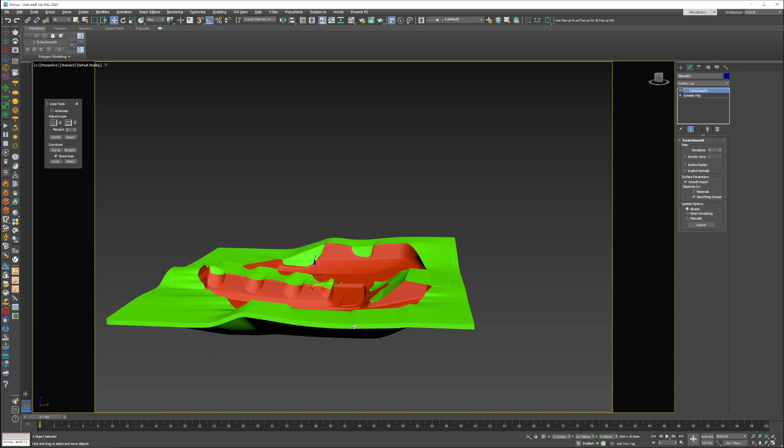And this is just, I mean, this is just sloppy work now. It's just getting to the finish line, if you will. So again, this is the back side. This is 3D printed, doesn't matter, this is not our actual hero surface. This is just making a 3D object that will 3D print. So you can make it a lot cleaner, you can make it even messier, it's really up to you. It's just, this is how we get to the finish line.

So for me, the most important area is right here where we clamp it off, where I would clamp it off with the hose connected. So alright, let's just do this. Alright, our formula is -1, so we got to do 18 segments here. 18 segments.

That's perfect, now that is working. Alright, so what are we at? 25, that means 24. Now, as you can see, that is working great. Alright, and last but not least, 32. So 33, or -1, so that's 31.

Alright, perfect. So now that we have that, we're going to go in and select this. Again, just offset a few of these, make it easier on the program, create less surface issues, if you will. There we go. Almost at the finish line.

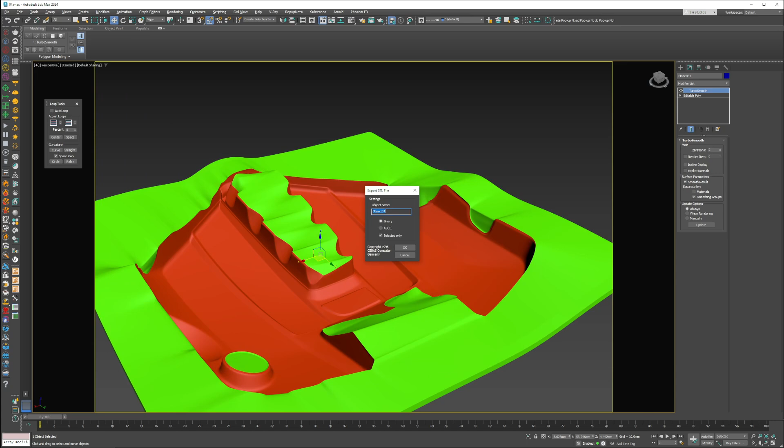So let me just confirm that it works. I'm going to pause the video and put it in Bambu Studio. Oh, and to do that, you go to File, Export, you click Export, and I'm just going to go to Desktop. There's a folder that I have here called STLs, this is where I put all my STLs. Alright, here we go, and I'm just going to call this engine cover STL. Well, let's do RCF engine STL, and you just leave it as whatever it is, selected. Alright, now I'm just going to put this in Bambu and double check that it's good.

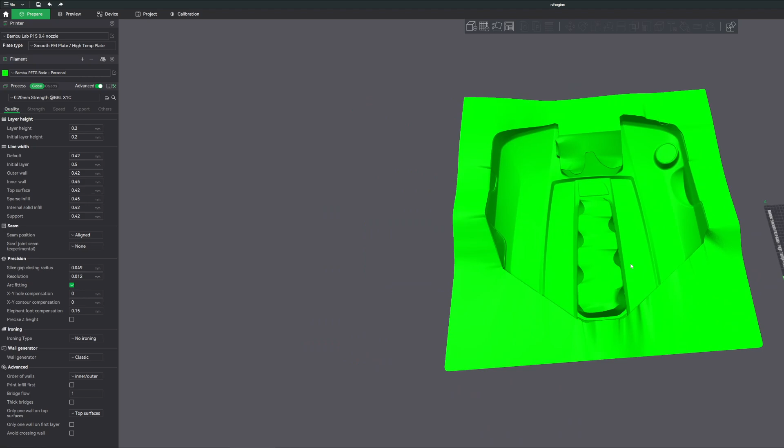Alright, here is the monster. Well, I sure as hell am not going to slice it, but the good thing is it's not giving us anything about, oh, your geometry has issues, blah blah blah. Yeah, it's going to be a nightmare to 3D print, that's a lot of stuff. That's not my problem, that's my friend's problem. But that's how you make flanges in 3ds Max.

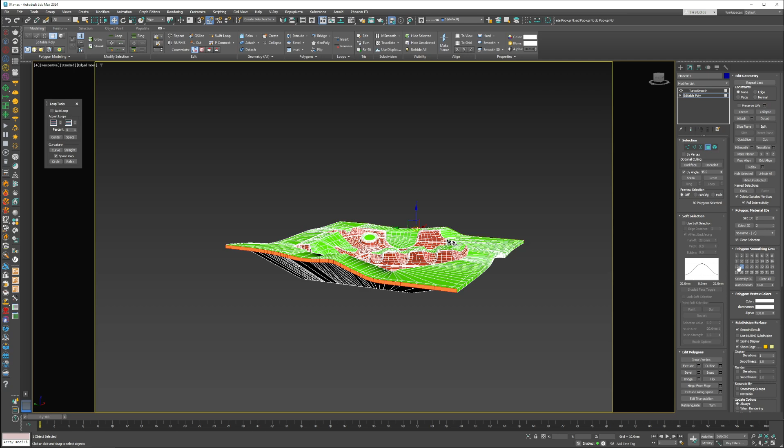And the one thing I will say, okay, so here's the key ingredient. See how these corners are rounded? I personally do not like that for 3D printing. So what I like to do is, this is where the whole smoothing group stuff comes in. We're going to go in, select by angle, we're going to select these, make it like material ID 18. This is where I just send it with random values just so I know it's not going to be selected. So there we go, now our corners are nice and straight.

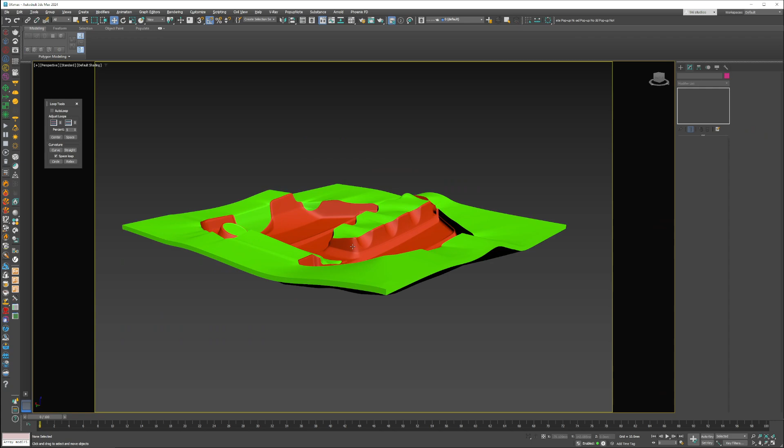And one other thing I like to do to make sure that it is perfectly straight is go back and do view align, so that way when you do slice it to 3D print, you could lay it perfectly flat on these faces, so you could print it upright, if that makes sense. So there you go, that's making flanges on your 3D part in 3ds Max. And yeah, this is definitely a more complex object than what I usually deal with, but that was a great way to make a tutorial on making very annoying flanges. I mean, it would be way more annoying to do it with cardboard or whatever. So, guess pick your poison. But done, hope it helps.